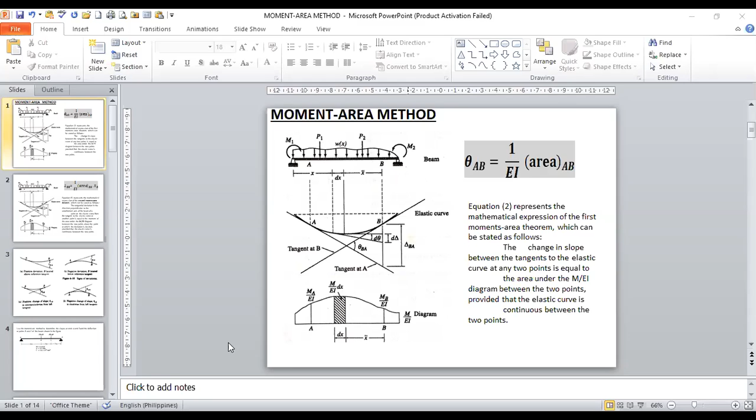This method utilizes graphical interpretation, and integration is involved in solving the deflection differential equation, which resulted in the integration method. Meaning, it's more convenient to use this method than the integration method we had.

To get the deflection or the slope, this is the second derivative of y over dx square, which is equivalent to moment over EI, dx, plus C1.

So by deriving using the geometrical or the area of the moment, the resultant moment resulted from the loadings of the beam, this is the formula we can derive.

So this theta AB, meaning the deflection of point B over point A, is equivalent to the area of the moment diagram below the loadings over EI, which is the change in slope between the tangents to the elastic curve at any 2 points, equal to the area under the moment over EI diagram between the 2 points, provided the elastic curve is between the 2 points.

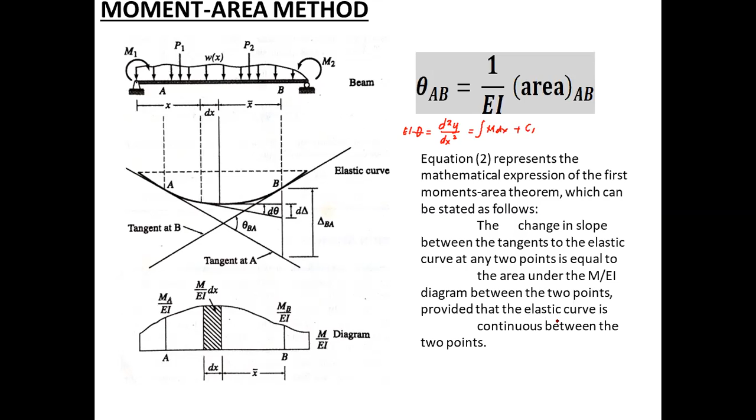Then to get the deflection, if we take the deflection at point B, this is point B, and up to here is the exaggerated amount of deflection, which is the delta at point B with respect to A.

Or sometimes it's more convenient to use what is called the deviation of point B over point A, from point A. So that is the deflection at point B.

On the other hand, this can also apply here. If this is point A, and we take the deflection here, this is the deflection of A from B over B.

Also, using the integration method, this is EIY equivalent to double integration dx, plus C1x plus C2.

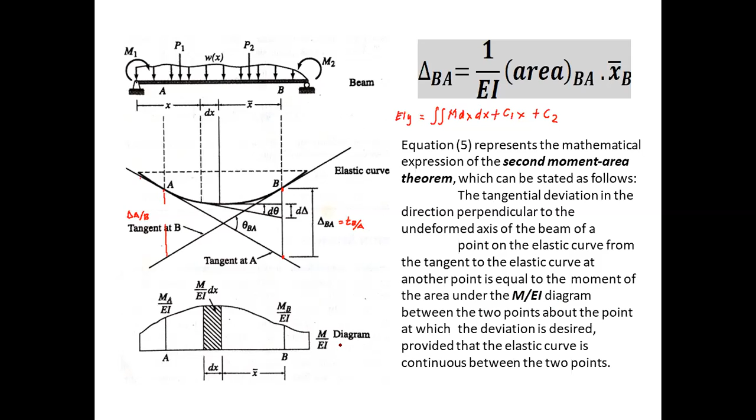So let us have our example.

For this notation, or our sign convention: the deviation is positive when B is located above the reference tangent, and it is negative deviation if B is located below the reference tangent.

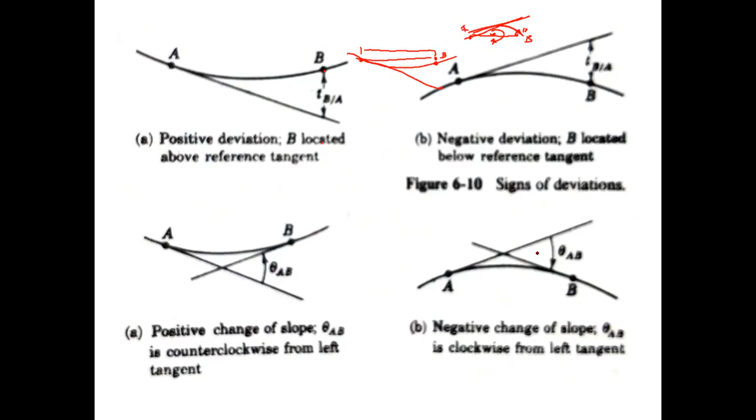For example number 1: use the moment area method to determine the slopes at end A and D, and the deflection at point B and C of the beam shown.

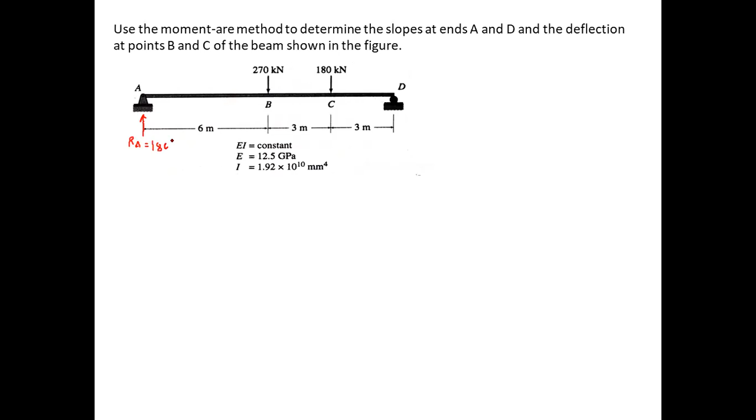Given the EI rigidity, since our loadings are in kilonewtons, let's convert this into kilonewtons and meters since our distances are in meters and our loadings are in kilonewtons. This is equivalent to 12.5 multiplied by 10 to the 6 kilonewtons per square meter.

And this, let's convert to meters to the fourth power, which is 1.92 times 10 to the negative 2 meters to the fourth, because later we will substitute this. Then draw the moment diagram.

May dalawang method dito. Yung area moment, resultant moment ang ginagamit. Then yung isa ay moment diagram by parts. I-demo ko muna dito yung moment diagram by parts. So kung saan ka conveniente na mag-stop.

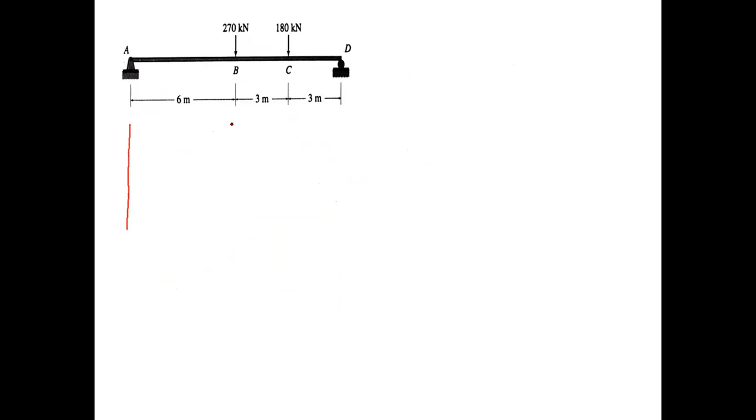So dun sa resultant moment, area moment, pwede mong gawin from left to right or right to left. So meron na tayo dito na answer. Ito ay 180. Ito ay 270.

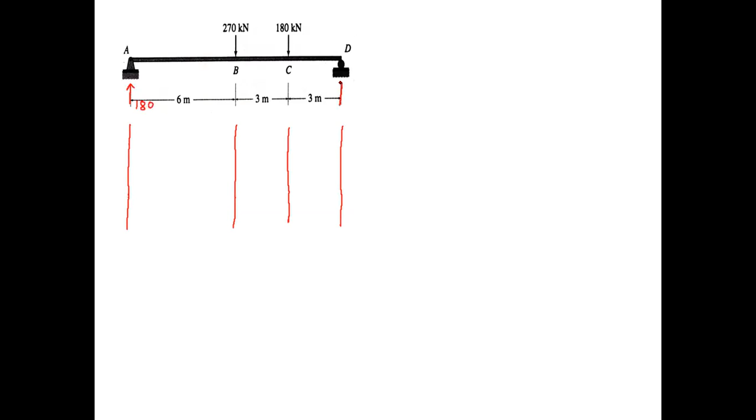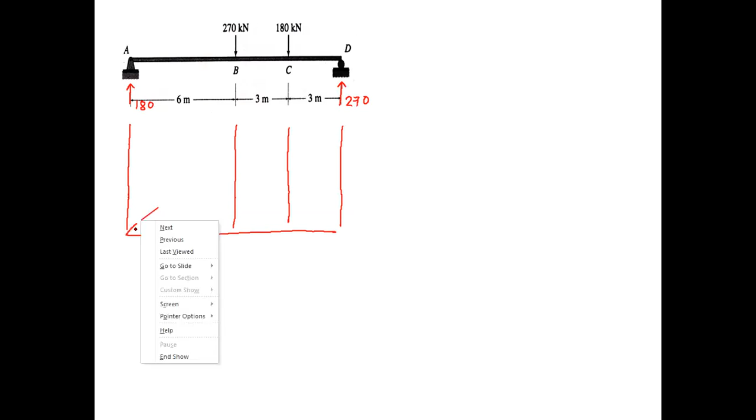So from here up to point B, 180 multiplied by 6, that is 1080. So hanggang dito.

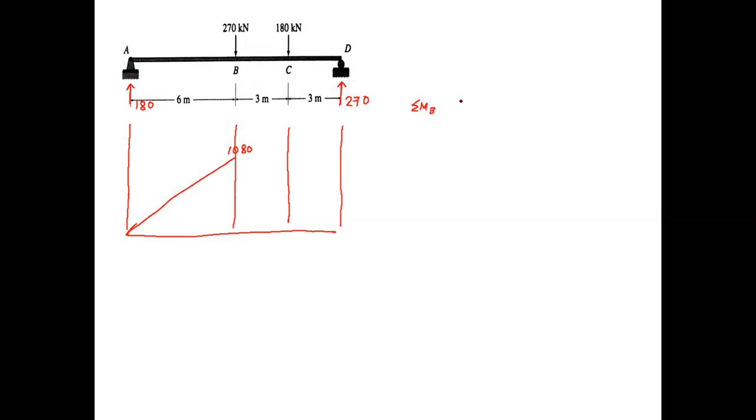So pag nandito na ako, ano na yung resultant moment? Ibig sabihin, ano na yung summation of all the moments of forces dun sa left side hanggang dito sa B. So ibig sabihin, 180. Summation of moment at point B is equivalent to 180 multiplied by 6, which is equals 1080. Natural, ito ay kilonewton meter.

So summation of moment sa point C is 180 multiplied by 9 minus 270 multiplied by 3, which is equals 810 kilonewton meter. Summation of moment hanggang sa point D is equals 180 multiplied by 12 minus 270 multiplied by 6 minus 180 multiplied by 3 is equals 0.

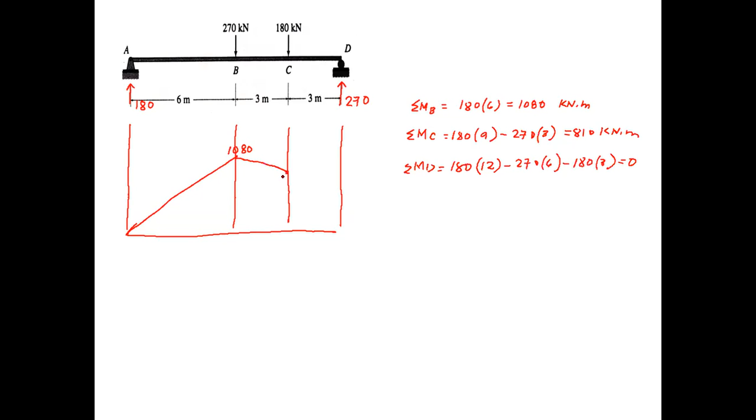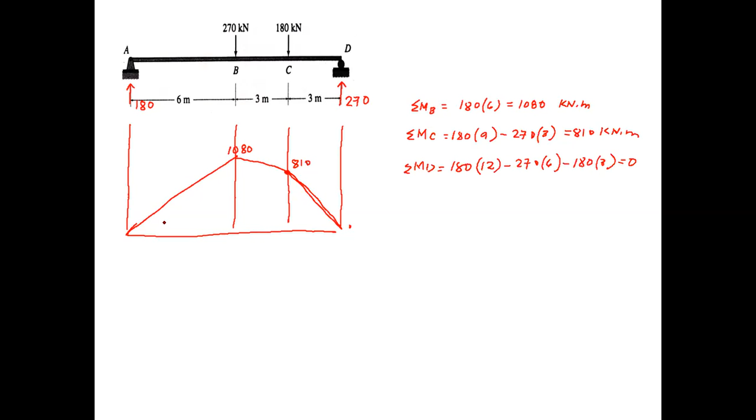So paano yung plotting niyan? Kung from 1080, ang kasunod ay 810. Ito yun. Kasunod ng 810 hanggang sa point D, ito yun. Kaya ito yung shape ng ating resultant moment diagram. Ito ay 810. So therefore, there is 0.

1080 over EI. So ito yung exaggerate elastic curve po natin. So nandito na yung slope at point A, slope at point D, yun yung pinakukuha sa atin.

At ano daw yung deflection sa point B. So ito yung amount ng deflection sa point D. From the undeformed shape hanggang doon sa...

lundo ng elastic curve, then from point C hanggang dito. Ayan, so ito yung tinatawag nating slope o deviation ng slope o point D with respect to A. At ito naman yung sinasabi ko kanina na deviation ng point D with respect to A.

So kung ito yung kukunin natin na deviation, knowing na yung formula natin kanina na na-derive, that is equals to delta D with respect to A, or simply delta dA, is equals area ng moment diagram over EI multiplied by ito, centroid ng certain area measured to point D.

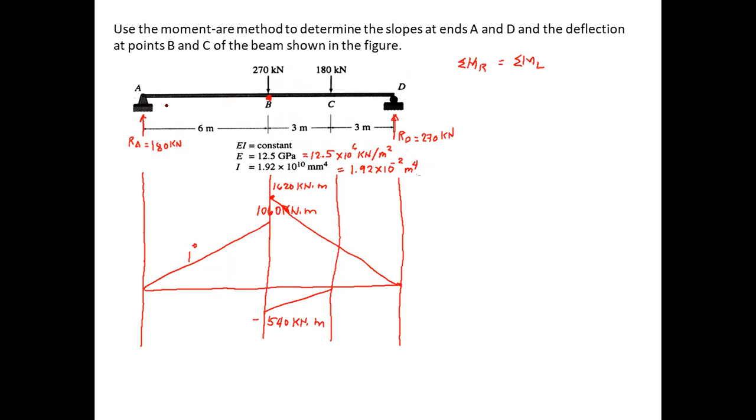Ito yon, kaya nag-exaggerate tayo ng elastic curve saka sa D. So ito yung slope niya. Pag nag-drawing, syempre tayo ng tangent, dyan, ayun yun. Yun yung nakadrawing kanina. At tangent din dito. So from the undeformed shape hanggang doon sa tangent, yun yung slope niya sa point D.

Ganon din dito, slope. May slope ba ang point B? Yes, meron. Ayan, so ito yung ano niya. Ito yung kanyang point sa point B, sa elastic curve. Pag nag-drawing ka ng tangential line dyan, kung saan man siya mag-meet, that is your slope. So slope to ng point B. Actually, point B over deviation ng slope ng B over to A.

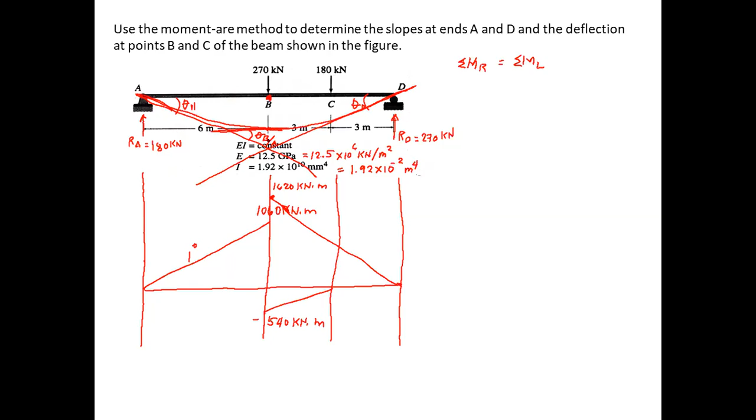So kukunin natin lahat ng tanong dito: itong slope sa A, slope sa D, saka yung deflection sa C at sa B.

So summation, dito tayo. Ito yung kukunin natin na amount ng deflection, isa-summarize natin yung area sa ilalim. So ito, 1080 siya, that is equals 1080 multiply by 6, lahat yan over 2, kasi triangle, so yan yung area.

So what is the, ito yung kanyang centroid. So dito, ito ay 2/3 ng length, at ito ay 1/3 ng length plus lahat ng dadaanan niya. So 1/3 ng 6 ay 2, plus 3, plus 3 ulit. Kaya ito ay nakamultiply sa 6/3 plus 6, ito yung 1/3, 6/3 plus 3 plus 3, yun yung 6.

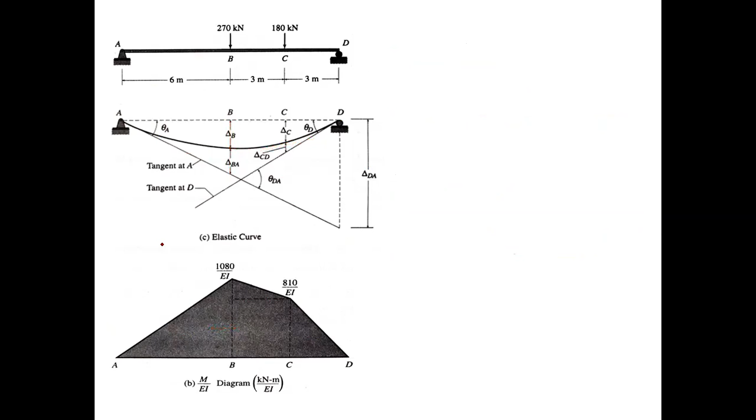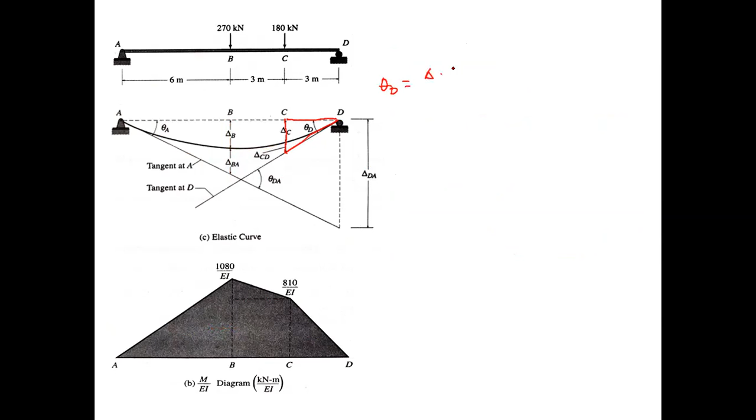Okay, deflection naman sa point C. So dito naman tayo, ito naman, itong triangle naman na to. So yung triangle na yan ay deflection or slope ng point D, which is equivalent to height over run, delta C plus tangential deviation of point C to D over 3.

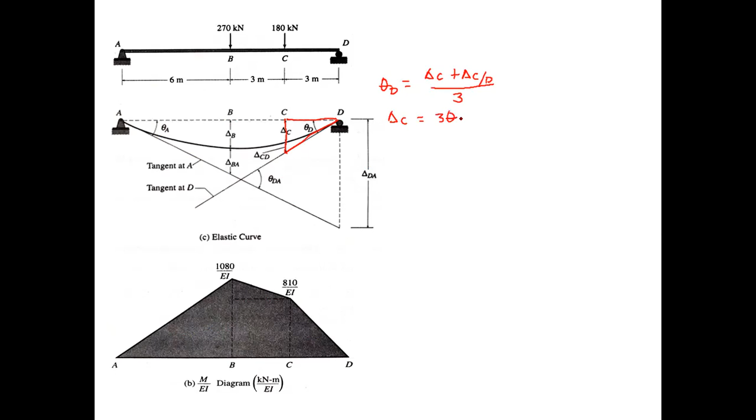Therefore, ang deflection sa C ay equivalent ng 3 meter multiply by slope ng D minus tangential deviation ng C with respect to D.

Kunin muna natin to, kasi may amount na tayo nito na compute na natin kanina. C over D ay equals, so tingnan nyo lang yung area nung C to D. So ito lang na triangle na to, ang under nun, 8, 10, 1 over EI, 8, 10, multiply by 1.5 which is kalahati ng 3. So yun lang, multiply by moment arm, ito, kasi deflection siya, may moment arm, 2/3 ng 3 which is 2.

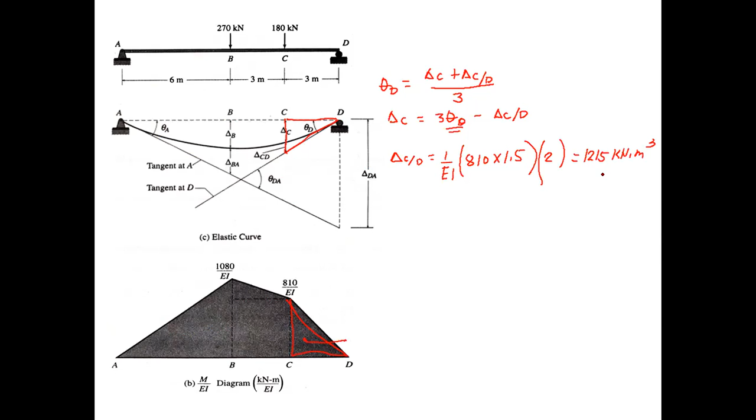Equals 1215 kilonewton cubic meter over EI. So therefore, yung deflection sa point C ay equals 3 multiply by yung deflection natin na nakuha kanina which is 3847.5 - yung slope ng D ay 384, sorry.

3 × 3847.5 minus 1215 all over value ng EI which is 12.5 times 10 to the 6 multiply by 1.92 times 10 to the negative 2. 0.043 meter, which is 43 millimeter